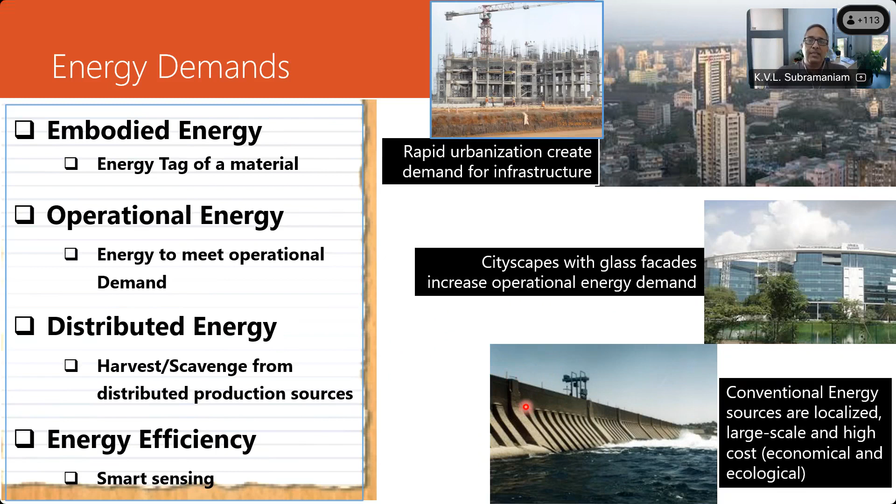And of course, to top it all off, coal is now a bad word. It's a dirty word because coal is associated with carbon. Carbon is a very bad word now, and we're trying to mitigate its effects because of the associated risks of climate change. So this is the overall story, the things we are grappling with, and the construction of tomorrow will have to address all of these issues - whether it's our built forms, the need for infrastructure, how we address it, and how we handle our energy needs, with carbon as our background.

Now, embodied energy is becoming very important because we paid scant regard to this previously, but now we're looking to address this issue because at some level, energy gets linked to carbon - energy comes from burning coal, and that has a very negative impact on the environment. So we're looking at low energy materials and sustainable production.

This becomes particularly important in the context of construction and infrastructure, especially in the Indian context, as I will lay out in the next few slides. Now, the challenge for us is to produce materials in the large volume required in a sustainable manner. We need sustainability built into the practice of using construction materials. I'm going to confine myself to construction materials and the built forms we're coming up with.

So we need to look at the energy tag that goes into making these materials, and that would perhaps form a topic of another lecture. So I'll gloss over this for now, but probably talk more about this issue of operational energy.

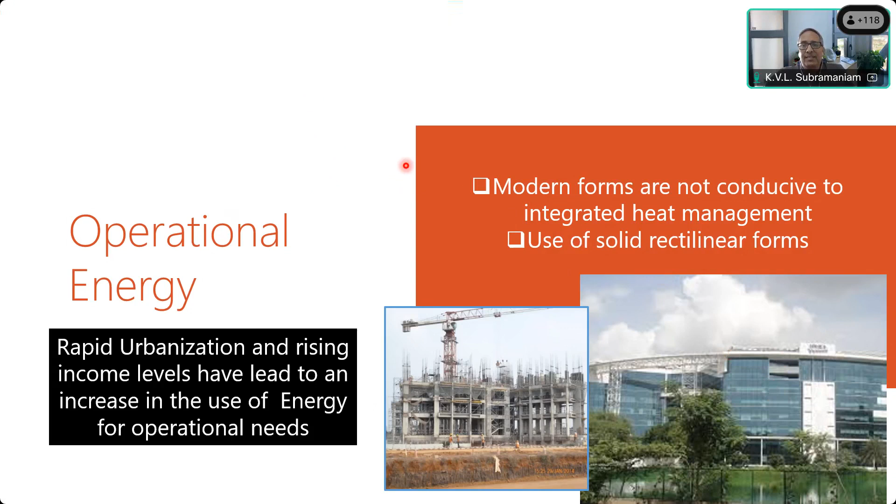Operational energy is becoming more and more important, and this has to do with urbanization - very rapid construction, but more importantly the modern forms we're constructing with massive glass facades, rectilinear forms, and thin solid systems. These are not very conducive to energy efficiency, in the sense that buildings we are constructing in the modern way have very large heat gains, and therefore the requirement of energy for cooling is increasing, making management of thermal and energy demands in cities a bigger challenge.

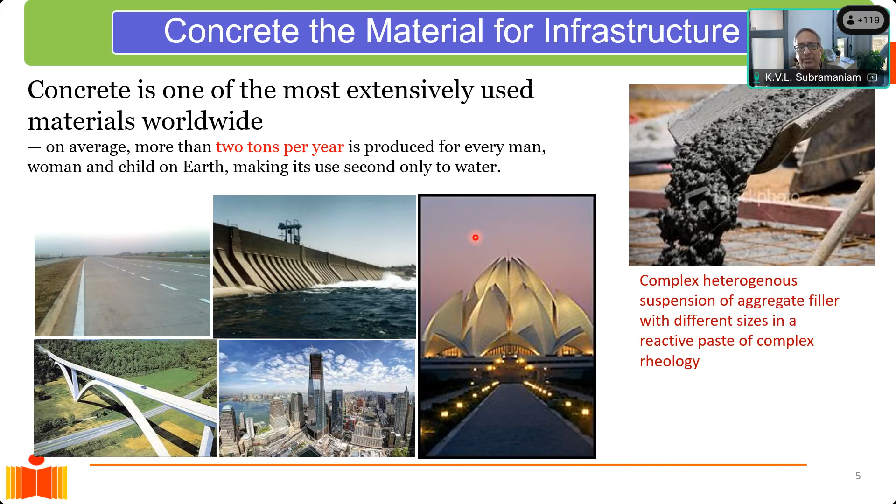Now, in addition to this, if you take a step back, concrete is the preferred material we use for construction. It's the largest used material on this planet - actually the second largest, next only to water. How much of this material do we produce and use? Almost 2 tons per year for every human being on this planet. That's the massive volume in which we produce and consume concrete, going into everything from infrastructure to buildings to roads to dams. Now, the problem with concrete is the cement that we use.

The issue with cement is that cement has a carbon tag associated with it.

So what are we talking about here? China produces the largest amount of cement, and India is the second largest producer of cement. How much are we talking about? It is so much that India and China together almost contribute about three-fourths of the total cement being produced on the planet.

Now, going forward, our consumption today makes us the second ranked producer and consumer of cement. But going forward, our requirement of cement to meet our infrastructure needs is going to be so large that we may become the largest producer and consumer of cement, and by 2050, that is the projection, that we'll perhaps be the largest producer of cement on this planet.

The cost there is that while cement itself is a low-cost manufacturing material with a very low embodied energy, if you look at a comparison of steel and concrete, cement has actually a very small carbon footprint compared to steel. But if you compound the carbon tag associated with concrete with the volume usage that we are projecting, cement is basically the third largest anthropogenic source of carbon in the atmosphere.

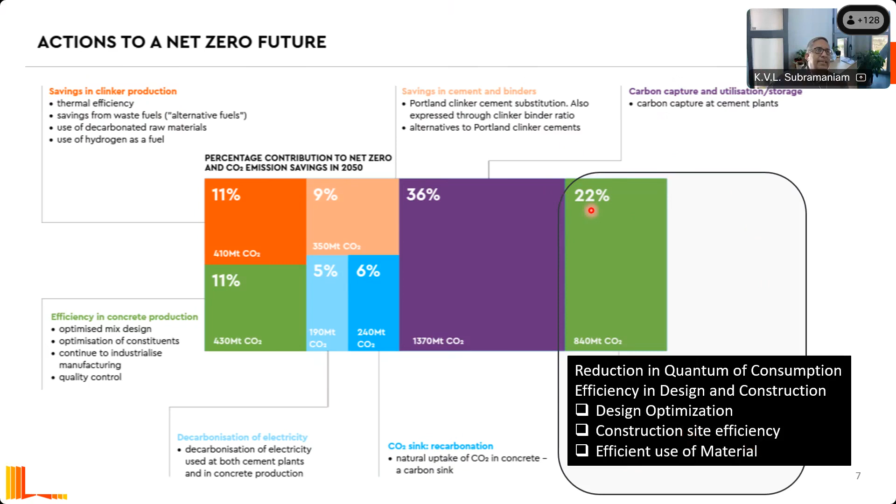Most of our designs, including the way we are putting up these constructed forms, are not efficient. What I mean is that we are using way more material than we need to, and in that process, we are contributing to this additional 22% in the carbon tag, which we can actually save if we go to this level of efficiency.

Now, talking about efficient structures. If you look at modern concrete construction, this is what we typically do: we assemble the formwork, then we assemble the steel, pour concrete, wait for the concrete to harden, and then we strip the forms and go to the next floor.

Now, this process is quite time consuming. It is not very efficient. And what is worse is that we are limited to rectilinear forms. And what I mean by saying rectilinear forms is straight line forms.

Now, if you look around your room, you'd find that we basically have all our beams, and if you focus on the beams, most of our beams are rectangular in shape. Now, the reason we make them rectangular is for expediency. Expediency in the sense that we basically opt for convenience during construction. It is very convenient for me to pour concrete into a rectangular form. And all of us know that rectangular beams are very, very inefficient.

I can actually give you a beam that gives the same strength and the same level of performance in terms of stiffness or any other parameter that you choose, using an I-beam perhaps, or a beam that uses a different shape than a rectangular shape, because such shapes are actually more efficient, structurally efficient. So I'm able to give you better performance for lesser use of material.

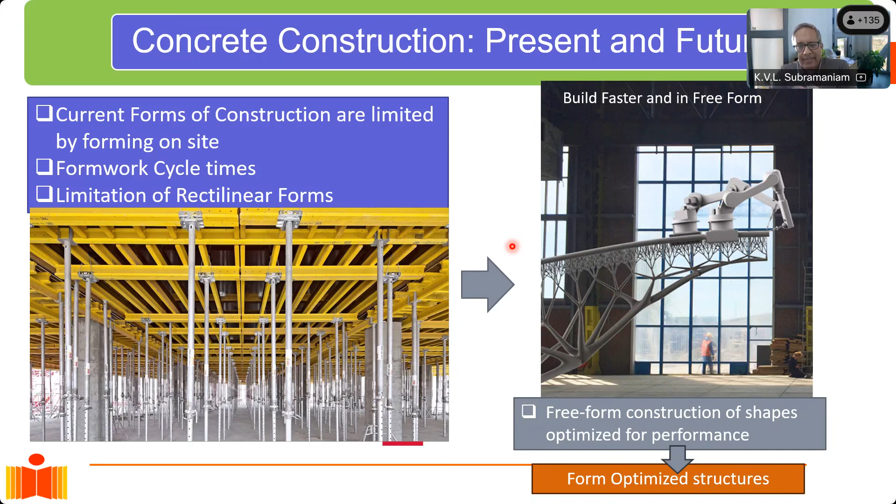I've kind of set the stage. I know I've taken a little bit of your time here, but now let's start moving. So what is 3D concrete printing? Basically, we've adopted from what is called additive manufacturing. The mechanical engineering community is very familiar with this. It's a very mature technology, which is used in production of several parts, in automated assembly, in automated manufacturing, etc.

There are different forms of additive manufacturing. And what we have adopted out of this is material extrusion, which is one of the forms of additive manufacturing. And that is the form that we have used in our construction. The reason is scale up, because this is the one form of production, and it's called additive manufacturing because

if you look at typical manufacturing, what happens is you start with a block of metal and you start removing material from there, and then you give it the final shape. So that is subtractive manufacturing, and typically that's what we do. But in additive manufacturing, what we do is that we add material and come up to the final shape.

So what do we do in the extrusion process? We basically construct a whole structure one layer at a time. And there are components of this additive manufacturing. We have the pump, and then we have the placement system. The pump basically conveys the material to the nozzle, and the nozzle is what moves around and places material where we want it to be placed.

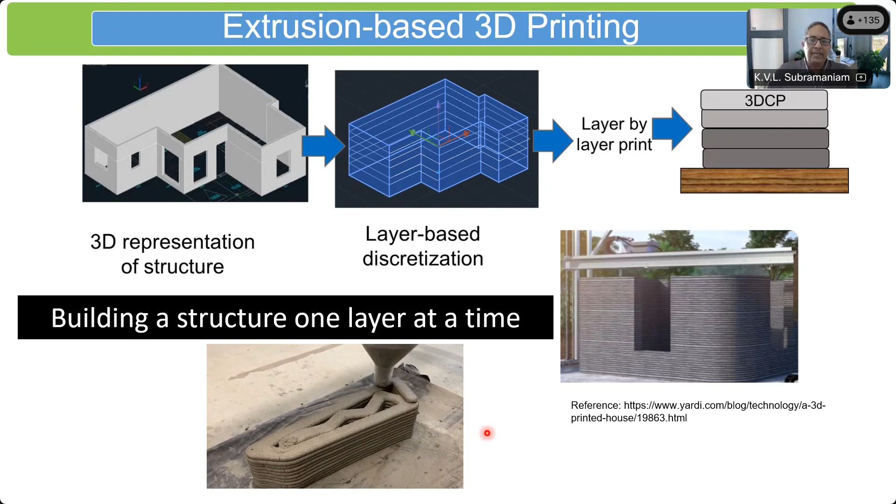So this is the printing process where you see the layers being added on to assemble the entire component. So concrete that's being printed in a layer by layer manner, right? So now, the process, like I said, in additive manufacturing, the way that we produce the layers information, it's called tessellation, slicing, the fabrication. All of this has actually been standardized in the manufacturing community. There's an ASTM standard that's available for use on this.

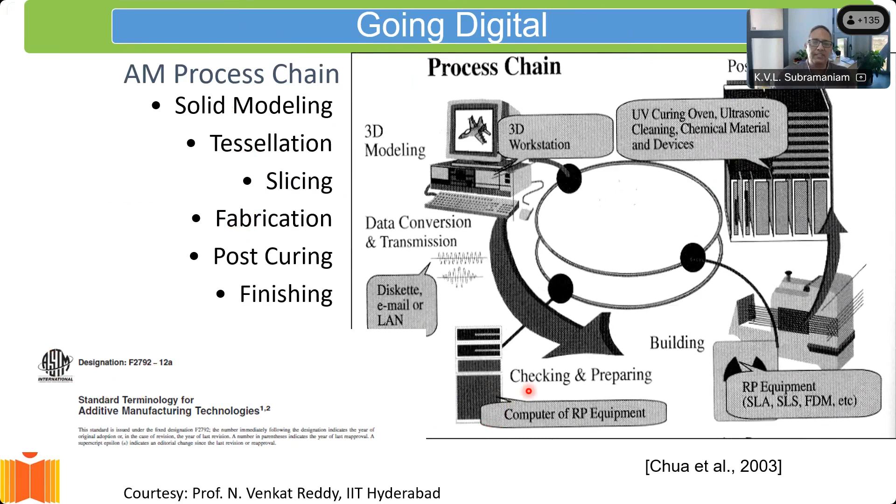And this extrusion-based 3D printing is used quite a bit now. In fact, one of the most interesting uses of 3D printing is in plastics, and bio inks are being used. In other words, there's a lot of talk about printing tissues, bioscaffolds, and a lot of our dental implants. Most of these are 3D printed today.

And the technology has advanced to the point that we're talking about printing on a miniature scale with precision. And where this works beautifully is that when you're talking about something like a human body, every person is different. So I cannot use a one size fits all. Customized solutions have to be developed. And that's where I can actually print, let's say, a bone or a tissue that is suited to an individual

based on their needs. So now the thing is, well, this technology is very well established, but how do we actually port it to civil engineering? What is our challenge? The biggest challenge that we have is most of everything that is happening in the manufacturing sector and in the bio sector, they are limited to millimeters or centimeters. What we need is something that scales up to meters and tens of meters. And the other challenge is the material that we're using.

So let me first give you some examples of what has been printed with concrete, just to show you that when you start freeing up the palette of an architect and remove them from the shackles of doing rectilinear structures, you can start doing geometric forms which have been optimized for a certain use, and they need not be straight line shapes, and you start providing better aesthetics.

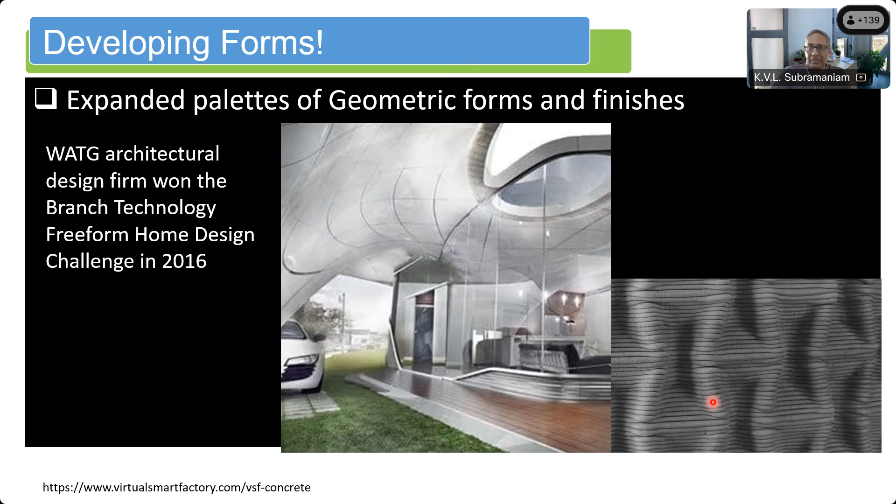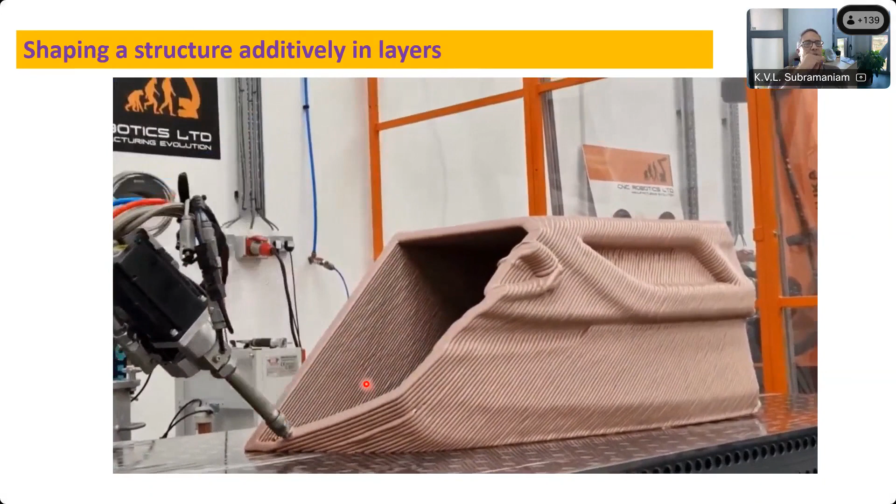Now, let's see if this video plays. I just want to show you about shaping a structure by adding in layers, and that we are not limited to producing shapes. And what I want you to see here is you can start printing shapes which are not limited to printing on a horizontal plane. If you actually get your material right, in this case, the material that's being printed is a clay, this is developed by CNC Robotics Limited, and you can see the kind of shapes that you can actually produce with this 3D printing technology.

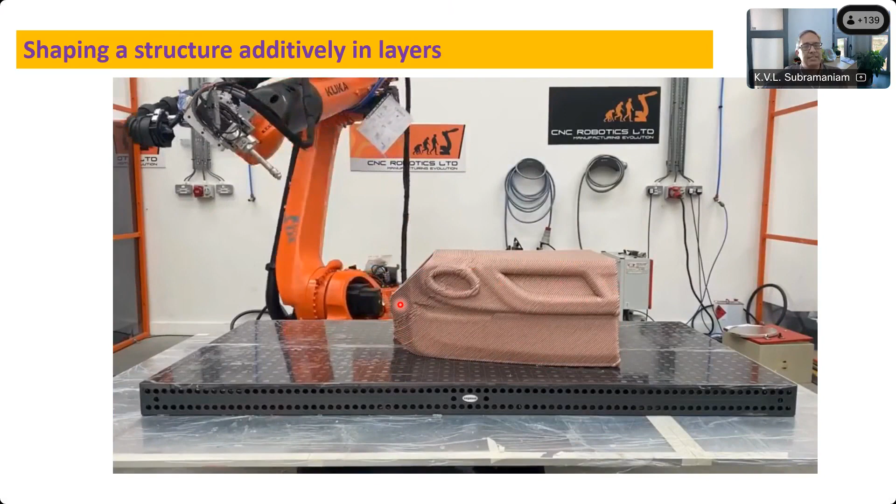Of course, there's a challenge with the material. It has to withstand the rigors. Once you deposit it, it shouldn't slide off, and all these requirements can be engineered. But you can start doing this. You can start giving these surface finishes. You can start doing these projections and other things. Those are all very much possible and within the realm of normal 3D printing.

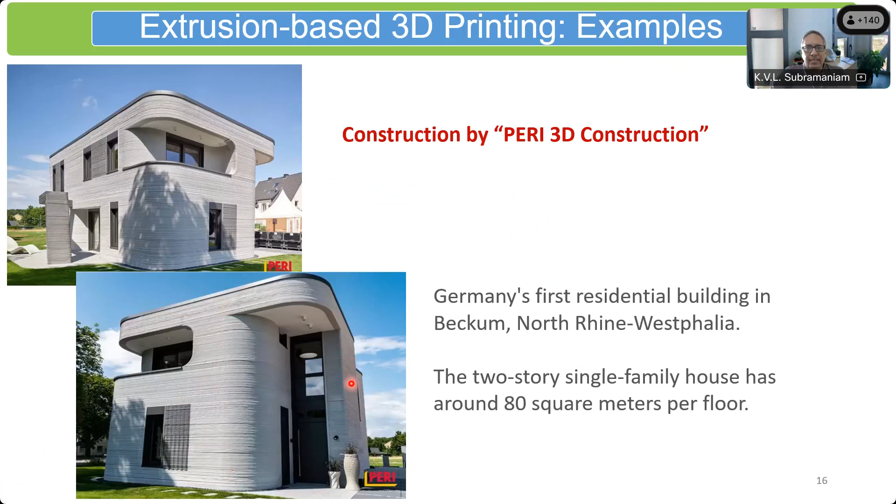Now, this is the first 3D printed house in Germany. It was about 80 square meters, about 800 square feet, done by PERI Construction, and you can see the layers that are deposited here. So basically, this entire house was built one layer at a time. The largest 3D printed multifamily house in Europe, it's a 5-family house, about 380 square meters. Took about 6 weeks to print the entire structure.

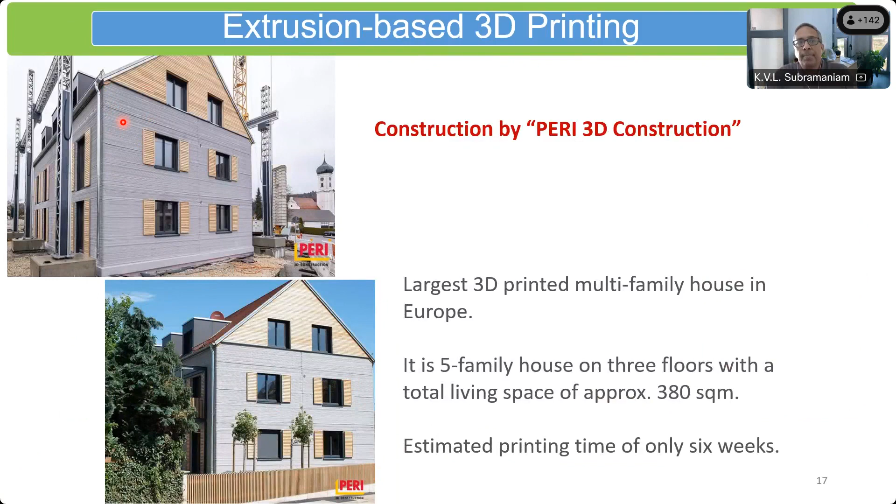Of course, we always give you the good news. We don't tell you the time that was used up in planning. But this serves as a demonstration that such things can be done. And the other thing you would notice as we go along is the sophistication that has increased with the printing. This was done 5-6 years ago. You see the layer definitions are very coarse here. These have improved over the years. Now we're coming up with very good layer finishes, and we are getting into more complex forms.

And Europe has now caught on to the fancy of going back to the traditional forms, whether materials or shapes. So they are experimenting with the use of clay, which was our traditional construction material, because it gives superior thermal performance and moisture control inside the house.

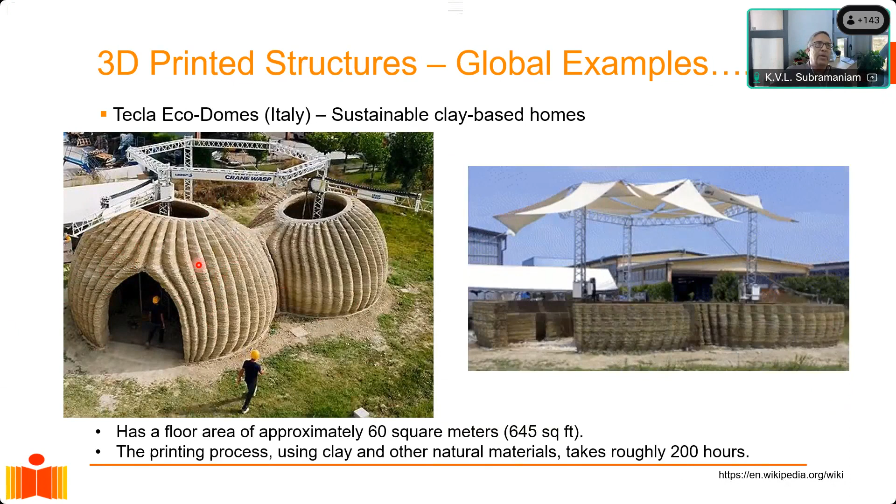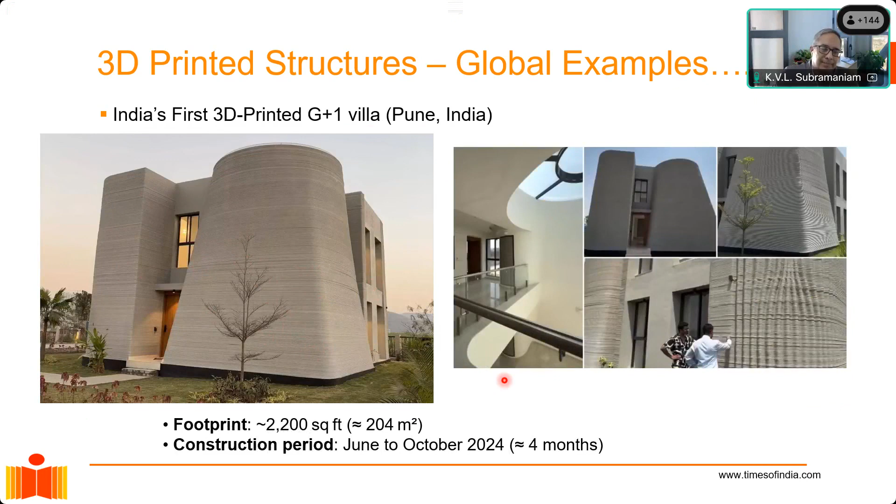This is a 3D printed house, a villa printed in Pune. You see the facades that have been printed, and the shapes that you can provide. You can incorporate elements of architecture to give better thermal comfort in terms of passive shading, or orienting the elements of the structure with respect to the direction of the sun. So 3D printed facades is another area where we can create beautiful facades with 3D concrete printing.

Another interesting application was done by Simpliforge, my industrial partner. They actually 3D printed a temple. So you see, this is the form of the temple.

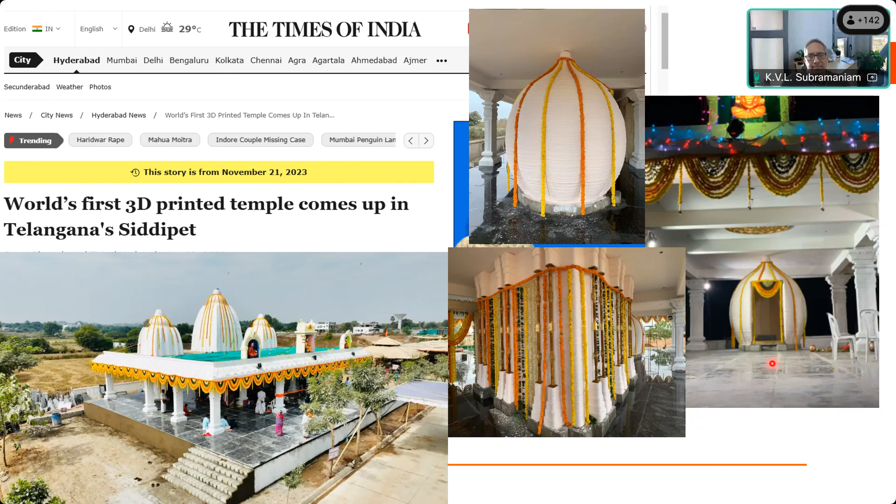This is the 3D printed temple. If you look at the spires of the temple, these were 3D printed. And if you look on the inside, one of the temples here is modak shaped, and the modak shape was actually printed. So the entire temple was 3D printed with these beautiful shapes, which can be customized for our cultural, aesthetic, or architectural requirements. That is the background about what we are doing with concrete 3D printing.

The most important thing, at least as an engineer, that I'd like to talk about is this concept of efficient construction, because now I have a technique which allows me to use material in an efficient manner. There's a whole concept we are developing called material follows force. What that means is, if I look at a rectangular beam and do a stress analysis...

I will find that there are several pockets within the beam which are not contributing to the structural response. In other words, I could remove those pockets of material, and successively keep removing material that is not contributing or not getting stressed highly, retaining only the material that is highly stressed. In doing so, I come up with very efficient forms of structures, which I'll demonstrate a little later, ending up with lightweight structures without compromising performance, produced using less material than conventional structures.

So this would again feed into this whole push for net zero, where I'm doing more with less, and therefore able to stretch the usage of my material to build more structures. That inherently gives us a leg up toward that 22% reduction target in the push towards net zero.

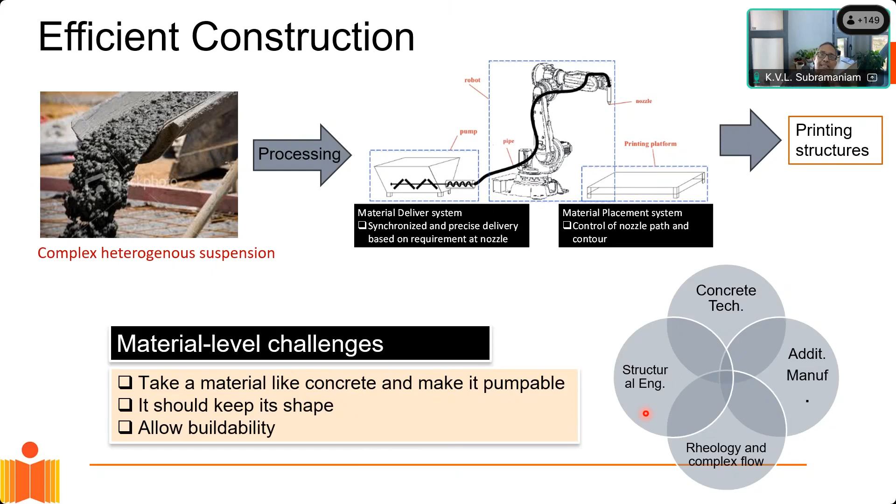Now, what about pumping? I'll take up each one of these things a little, one piece at a time. We are very comfortable.

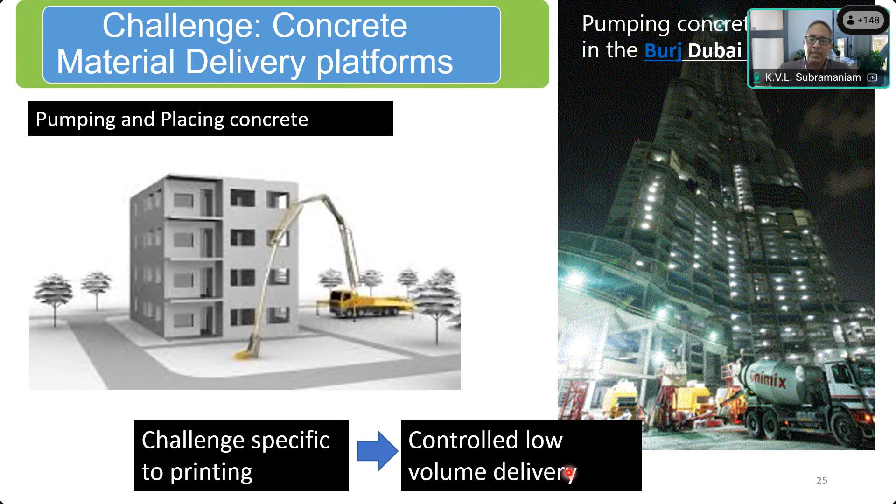But the pumps are developing. We are at IIT Hyderabad working on different pumping systems which will allow us to scale up to 10 millimeter aggregates, and slowly we'll catch up and start being able to deliver these pumps for 20 millimeter aggregate as well. Now, the next thing is the delivery platform.

You're pumping concrete, but it has to be placed precisely, which means I need some way of controlling the head—wherever you have your nozzle. This pipe conveys the concrete. Please remember, this concrete, as we're talking today, looks more like paste, because we're limited to smaller sized aggregate.

As this nozzle moves along, it starts depositing concrete. The movement of the nozzle itself is controlled precisely. We have two types of placement systems: one is called the gantry type 3D printer, and the other is the robotic arm system. The robotic arm system is basically a robotic arm, typical of what you see in car manufacturing assemblies—these are the same robots used for positioning systems.

Each has its own advantage, and now we've developed these on the industrial scale. Robotic arms give you flexibility and very fine control, but if you want to go larger, we use gantry-based systems, and you can start printing very large structures. Structures like silos have already been printed using these gantry systems, and I think about 30, 40 meter tall gantries are available today for printing.

Then there's also a crane style depositing or delivery system, which works on the concept of the crane we use for construction. This can even be mounted on a crane.

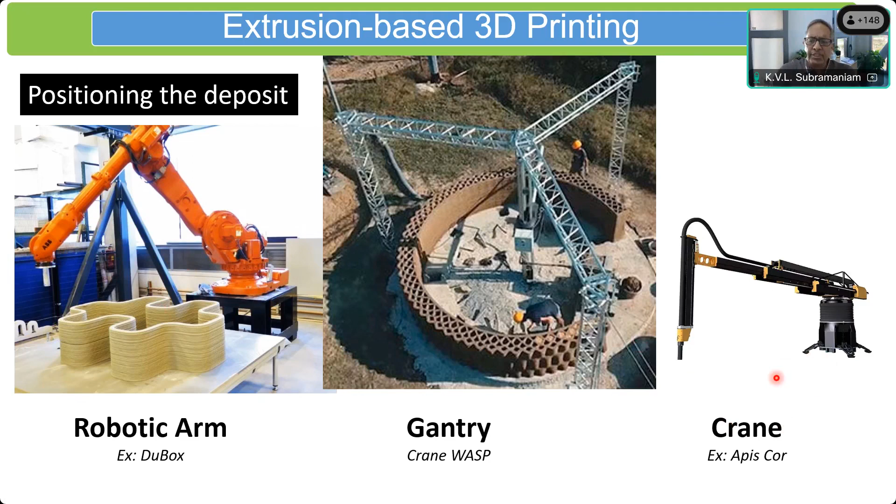So we've looked at the pump and the delivery system. Our challenge in the pump case was developing pumps that give us precise control on pumping material in very small volumes. The challenge with the delivery systems was scaling—the technology was already available from the manufacturing sector, but it was built for centimeter scale. We needed to scale it up to meters and tens of meters. Everything had to be scaled up, but that's done. The control systems, the programming, and all of that have pretty much been adopted from what's available in the manufacturing sector.

Then comes the next challenge—what we call the ink that we use. 3D printing is basically just like printing: when I print on a piece of paper, it deposits ink on the paper. In 3D printing, that ink is deposited in multiple layers—you deposit ink on one layer, then go to the next layer and deposit on that layer, and so on. This ink, the material I use to print, is the next big challenge.

Your regular concrete will not be printable. So what kind of material do I need? I like to illustrate that using this toothpaste analogy. What I want is my concrete to behave like toothpaste—if you look at toothpaste, when it's in the tube, it sits in a semi-fluid, gel-like state.

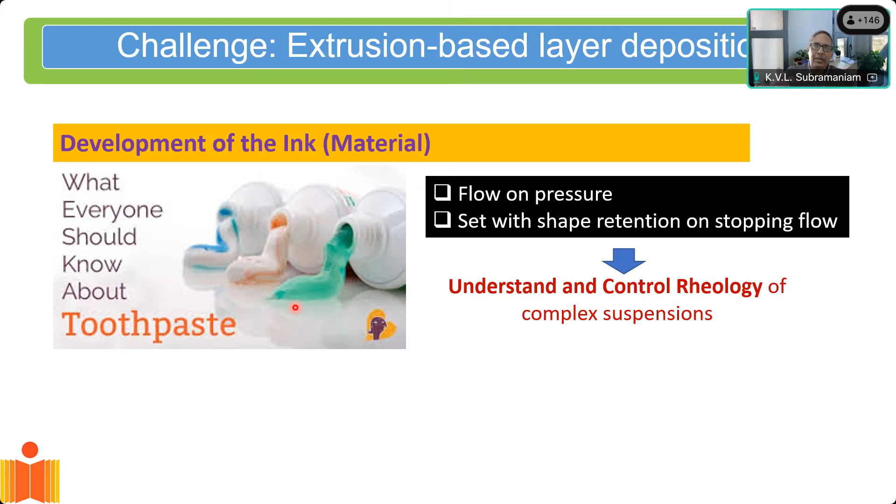In addition to this, I have another requirement called buildability. So what are the requirements of concrete that I need to address? Concrete has to be pumpable, it should be printable, and it should keep its shape. Up to this point, the pumpability and shape retention—it has to behave like the toothpaste I was talking about. But there's an additional requirement, called buildability.

Imagine I extrude one layer of toothpaste and start adding more layers on top of it. The bottommost layer should be able to withstand the stress coming from the additional layers without spreading, because if it starts spreading, the geometric shape gets distorted. So it not only has to be pumpable and have shape retention as it comes out of the nozzle, it also has to allow stacking of multiple layers—and all of this happens in a matter of seconds to minutes.

It's not like concrete is setting—it's while the concrete is still fresh that I have to allow this buildability. So these are extreme challenges in terms of material. I really have to engineer the material, and that's where most of our effort has gone: producing mixes that can be printed, meeting this troika of pumpability, printability, and shape retention and buildability.

Now, some attempts had previously been made. Shape retention is not a big deal—we use slip forming, already used in slip form paving machines, where concrete comes out with no formwork. It's extruded literally into shape. So we've mastered how to produce concrete that has shape retention. But this is not concrete that is pumped.

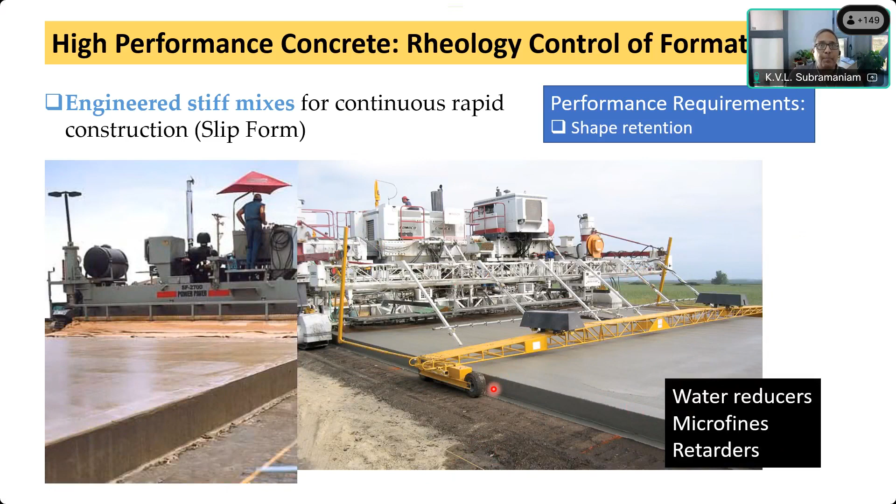That is one of the requirements of printing, but I also have to make it pumpable. So that was my additional challenge: somehow make it flow through a pipe, come out, and then keep its shape. That was the challenge in material development.

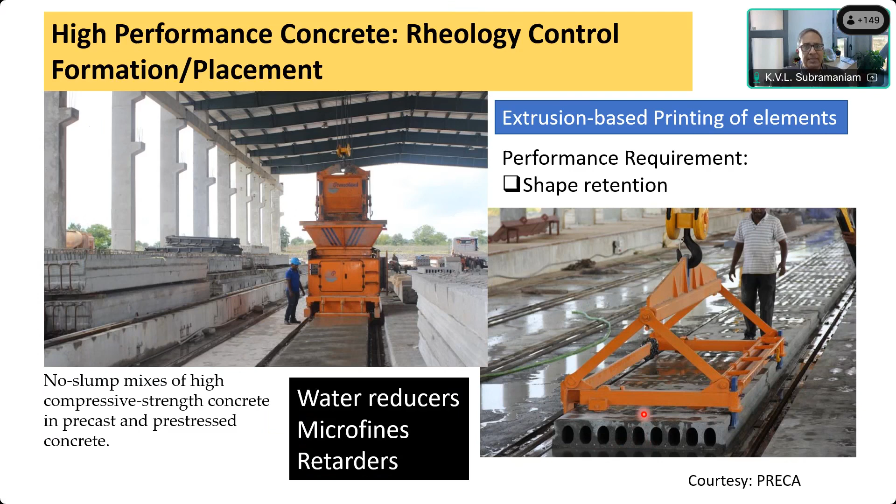The other property, dealing with buildability, brings in something called thixotropy. This is where we, as concrete engineers, started realizing we really have to understand the rheology of the material—how materials flow. Thixotropy is the behavior shown here: the material itself resists flow until you push it, but once pushed and it starts flowing, it flows very easily. So you see what's happening here.

It's like a rectangular or cubic shape. Once forced to flow by tipping it over this edge, it takes a circular shape and glides on the surface very easily. The minute it comes out on the other side, it goes back and keeps its shape. So what's happening internally is the structure is initially in that gel-like state—it won't flow unless you pressure it. That is the tipping point here.

Once it starts flowing, it'll basically allow smooth flow, and in fact optimize itself in such a way that you get small resistance to flow. And the minute you stop the flow or the pressure, once you come out on the other side of the ledge, it basically goes and takes the shape that was given to it. It becomes like this rigid shape again. This is called thixotropy, this property of a fluid which can change depending on the pressure state and structure itself internally, keeping its shape and allowing you to build on top of it.

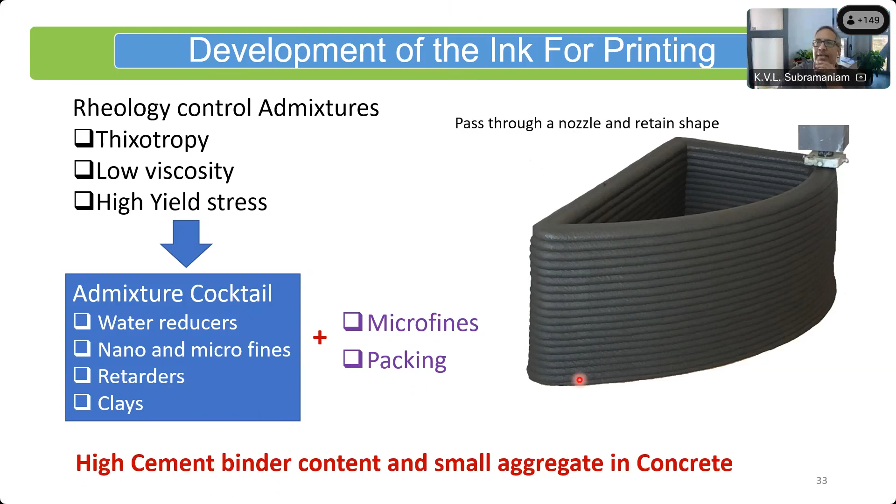The printable concrete mixtures are a cocktail of admixtures. We use a lot of admixtures in concrete today, a lot of microfines, and concepts of packing — everything goes into what we call a concrete mix today. But because of limitations of the pumps we're using, we are limited to concretes with high cement binder content and small sized aggregate. Currently we are limited to about 4 to 6 as the largest size aggregate in the concrete. Yes, I'm getting to reinforcement, so please bear with me.

Now, the next thing I want to talk about — we've talked about the challenges in the machines, the technology for pumping, technology for placing, and we've looked at the material demands. Now I want to talk about structural forms. Since I can deposit material where I want to, why not print shapes that are structurally optimized and give the best performance?

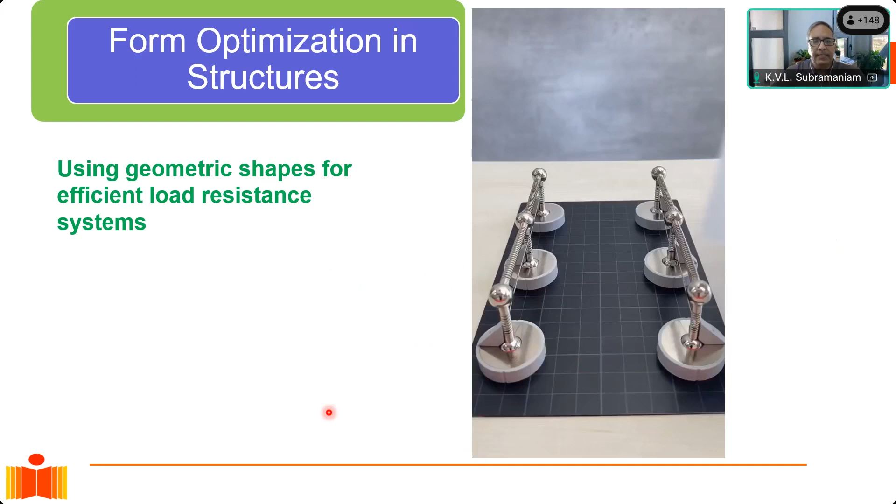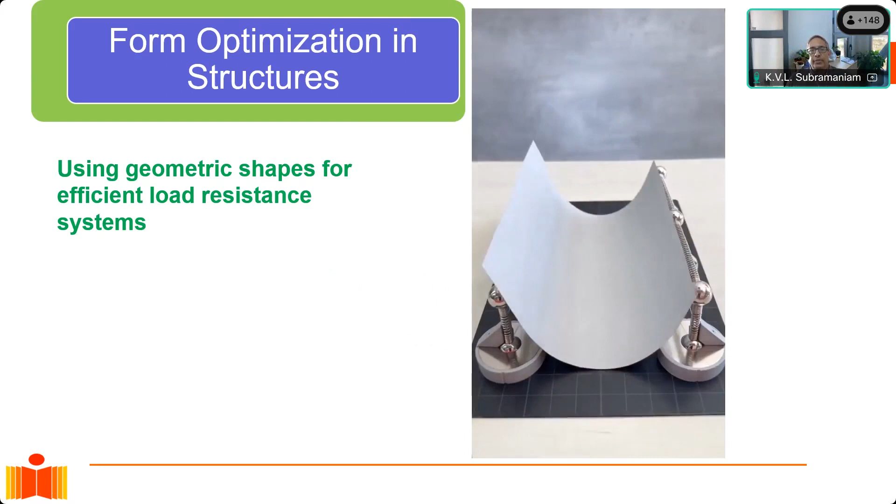Those structures would be called form optimized structures — structures that deliver more with less. Let me illustrate that, where I can use a geometric shape to provide a very efficient structural system. It's actually a video I got off the internet, not mine — it comes from LinkedIn. But just to illustrate the concept of form optimization, where I use geometric shapes to provide better structural resistance.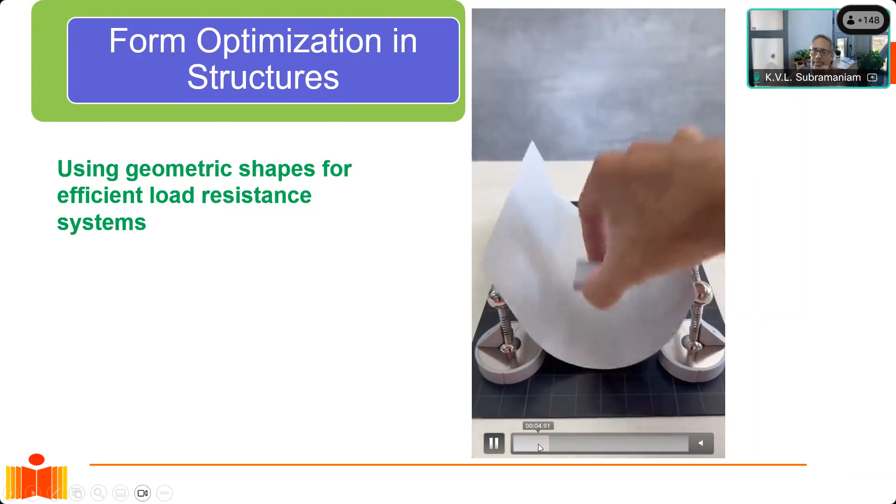So you see the difference between a flat structure and an arch. We know that an arch behaves much better in providing load resistance. Let me back up a little. This is a flat structure — if I use a flat element like a slab, we know it's not very efficient. The minute I go into an arch-shaped structure, you see that the load resistance improves significantly. It is able to carry much more load.

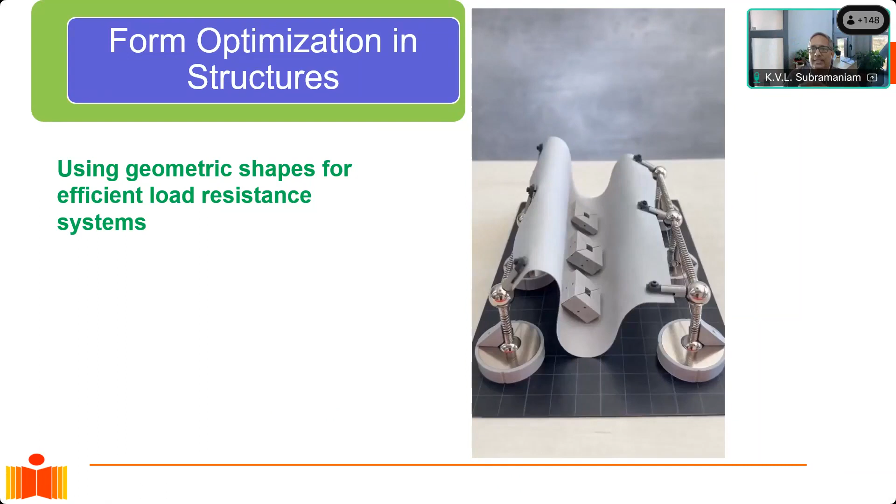But if I take the same arch and put it in this dimple-in, dimple-out kind of shape, you see that the structural resistance improves significantly. Same material, just the geometric form gives you significantly higher structural resistance. So what have I achieved there? Significantly higher load carrying capacity just by varying the geometry in which I'm putting the material.

The beautiful thing is that when I went from the flat structure to an arch, the entire structure is in compression. So when dealing with concrete, which is very strong in compression, I don't have to worry so much about reinforcement. Second, if I look at geometric features like those dimples in the arch, it becomes even more efficient in carrying the load.

So what stops us from doing these things? One is the current forms we are using — we used to build with arches and domes, but now we've gone with flat structures for obvious reasons. What stops us from doing these dimple shapes and other things is our current methods of construction. If you had to do that shape on site, it would be prohibitively expensive because of the amount of labor required and the formwork, which is not easy to assemble for that kind of shape.

But I can take it one step further and develop this concept of form optimization in structures. That's what we demonstrated at IIT Hyderabad, where we said: look, if you take a rectangular beam and apply a load on it, you'd find that the load applied is transferred to the supports in the form of an arch.

So this concrete basically carries this load in the form of an arch. Now the rest of the material really doesn't do much. And of course, if you have a concrete arch, you'll have to tie it together because there needs to be some tension.

So if I can now start working on this concept of an arch, I can start developing a very efficient structural shape. And basically doing that process, we came up with this shape for the bridge, which was structurally more efficient than what I got with a rectangular beam of the same size. And we basically demonstrated this concept in a bridge that we designed and installed on our campus. So let me now walk you through this.

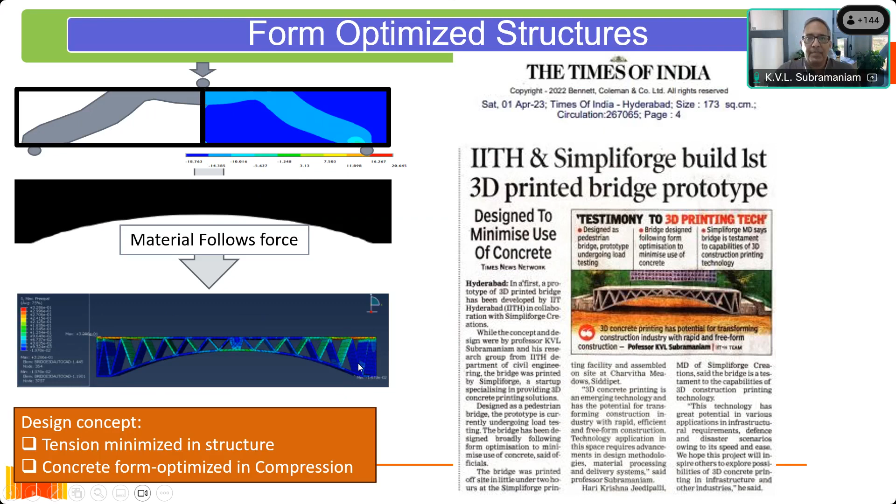This is the concept that we worked with. The concept was that of a tied arch. Now here, the concrete element itself would be in compression. So it's an arch. You need a tension tie to balance it, because otherwise you will not get a balance between compression and tension.

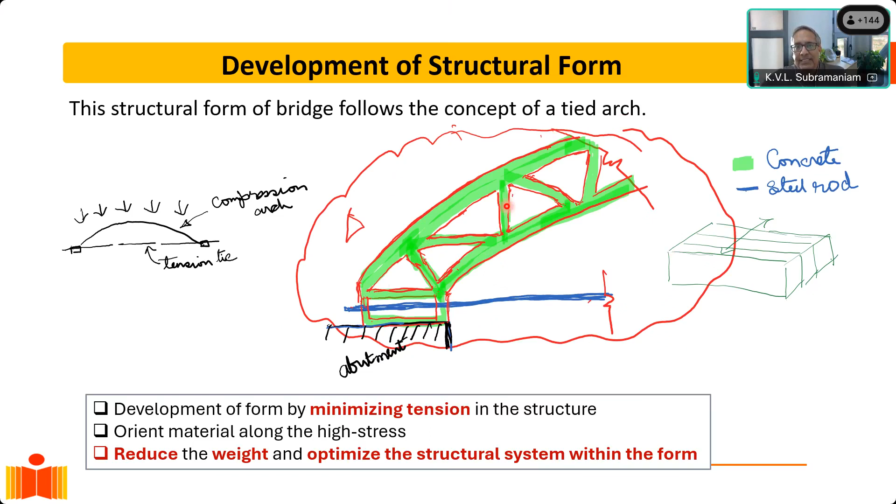So these are literally copies of my notebook that I was using as we were working in a group with my students of what I wanted the bridge to look like. I wanted a tied arch, and these are the filaments that we would actually print. So now let me walk you through the steps. So this is the point.

So if you take a beam and apply a uniform distributed load on it, you find that basically the upper arch here is where the concrete is in compression. The bottom part essentially is all in tension. So you can actually take away this concrete, which is in tension, and basically retain the compression part of concrete and tie it together with a steel tie. And what you have is this compression arch.

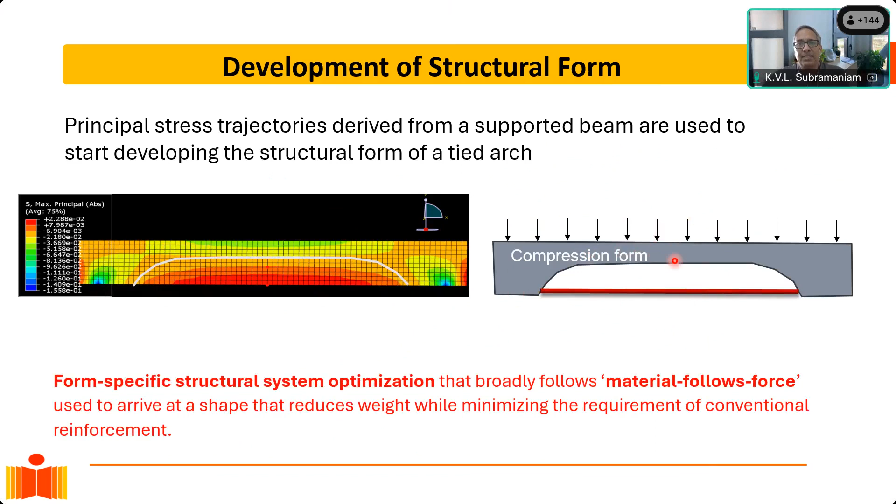Now within the compression arch, we can go one step further and actually develop a structural form, and this process of developing the structural system is called the Mitchell truss analogy. You can follow the Mitchell truss analogy, which allows us to basically develop structural forms following the stress contours that come from stress analysis. Now, broadly, I'll throw this term out there. We follow this terminology called topology optimization. Topology optimization is basically where you optimize a structure.

Now, if you think about the shape of any natural object, let's say we take the shape of our bone, there is a reason why it's in a certain shape. From millions of years of evolution, nature has come up with an optimized shape for the bone. And if you look at the bone, it's not solid, it's actually hollow. And it has a certain hierarchy. If you look at the porosity of the bone, it's also graded. It's not exactly uniform. That particular form of the bone has been optimized for a very high level of load resistance through a natural process.

Now, that is something that we hope to mimic here. What we're trying to do mathematically is to develop a form from this rectangular shape and come out with something that puts material only where it is required, and gives me structural performance that is on par or better than what I get with the rectangular beam.

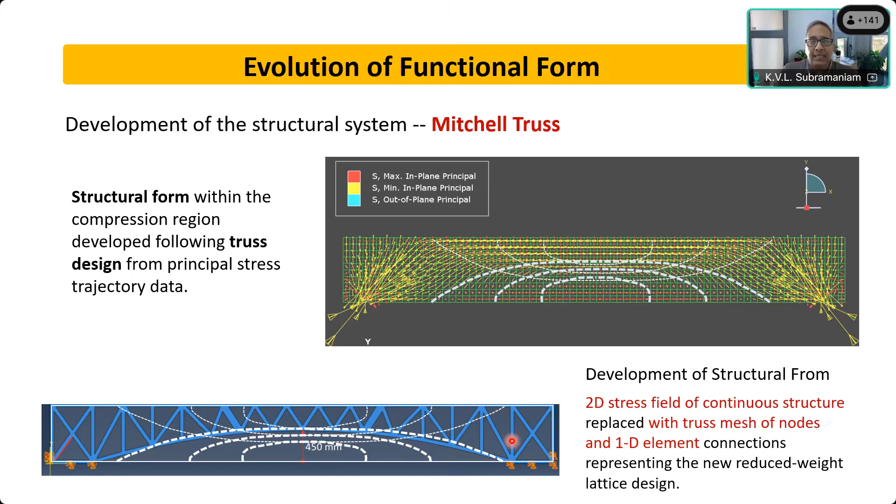So this is the bridge that was printed. It's a 7.5 meter bridge. The weight, actually, we've just redone the numbers. It's actually 1/3 the weight of a concrete beam that would be required to span the 7.5 meters. And this particular bridge has been designed for IRC standards as a pedestrian bridge. When we actually did the analysis, we found that it could actually support the weight of full traffic. So I could actually put it for IRC class loading, even allow traffic on it.

Now, if my video plays here, I get a 5-minute break because I let my students do the talking. They're the ones who were actively involved in printing this, the video.

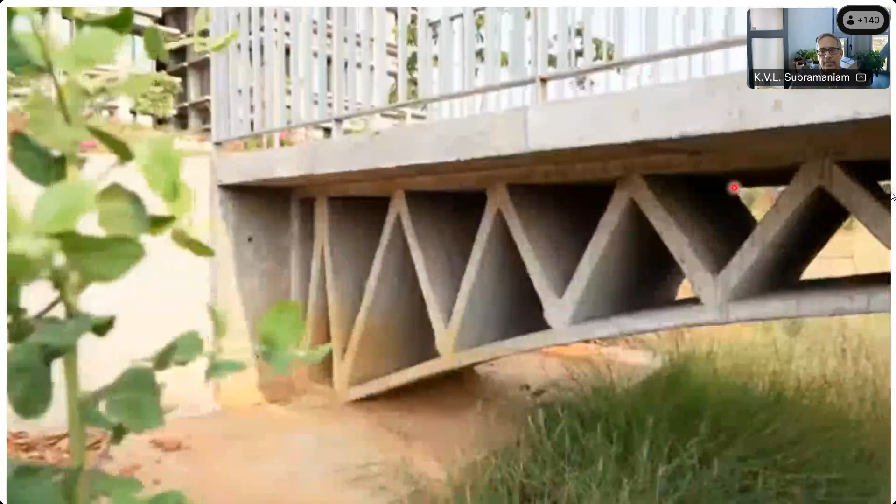So this is a bridge that has been 3D printed. It is off-site printed. It has been designed to IRC standards as a pedestrian bridge. The final form that you see here has come out of a process called material follows force. What that allows us to do is to deposit material where it is required. We can deposit more material in the highly stressed parts and less where the stress is lower. Following this process, we end up using the material very efficiently, and what we have are lightweight structures. And this bridge is a demonstration of this material follows force.

Using this principle, we explored different geometries. Each of these geometries was stress analyzed, and the stresses in each of the members were calculated and checked, and the best geometry which had the stresses within the permissible limits was finalized.

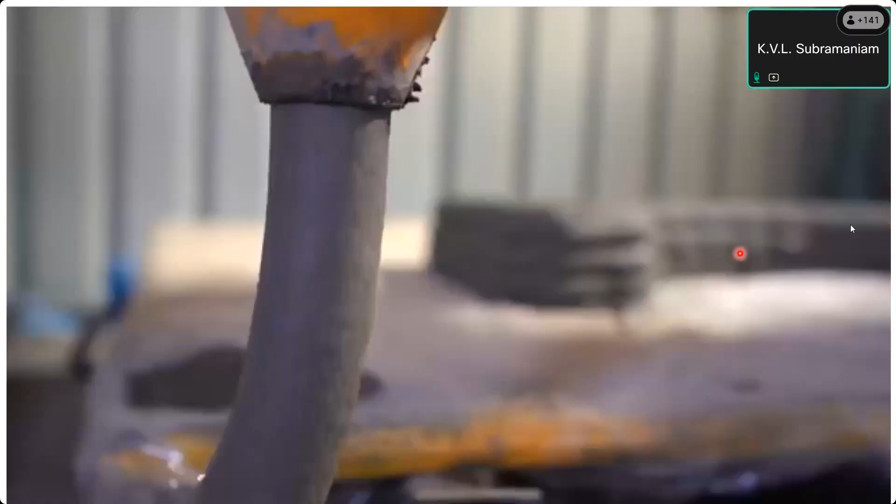The material, the concrete material that could be printed or printable concrete, had to be developed, and it was developed. This material has to withstand the rigors of pumping and give us the characteristics of printability. So such a material was developed. It was extensively tested in our laboratory.

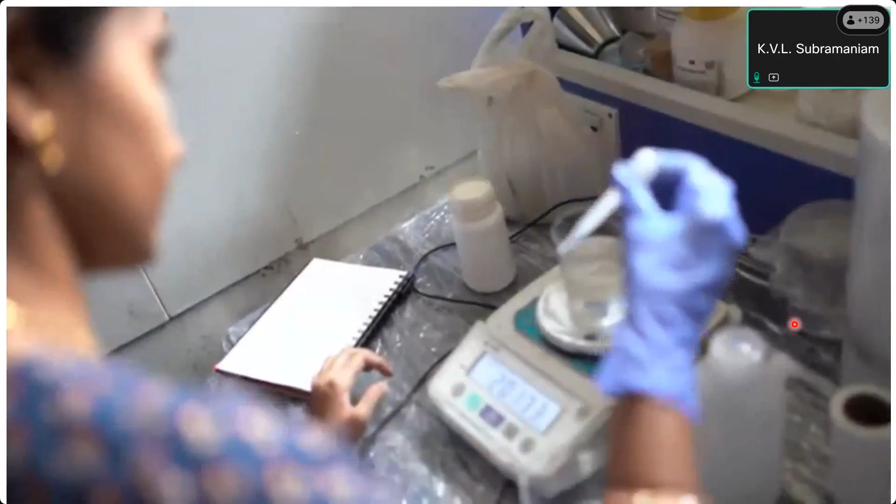The basic binder, which is developed for strength, is not actually suitable for printing. So engineering the material to understand the rheology and to achieve the printable properties would be the most critical aspect. So to make it printable, the rheology needs to be understood and modified accordingly. So the rheology requirements for a printable material or a printable paste would be a high yield stress, low viscosity,

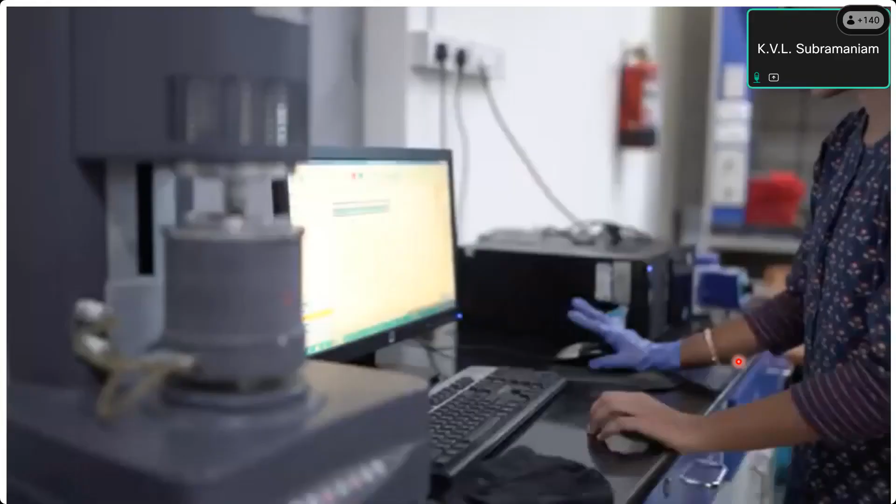and an adequate thixotropy. When it comes to concrete, the important parameters would be particle size distribution and volume fraction of the aggregate, and then the packing of the material. So only when all of these properties are engineered properly, a 3D printable material can be achieved.

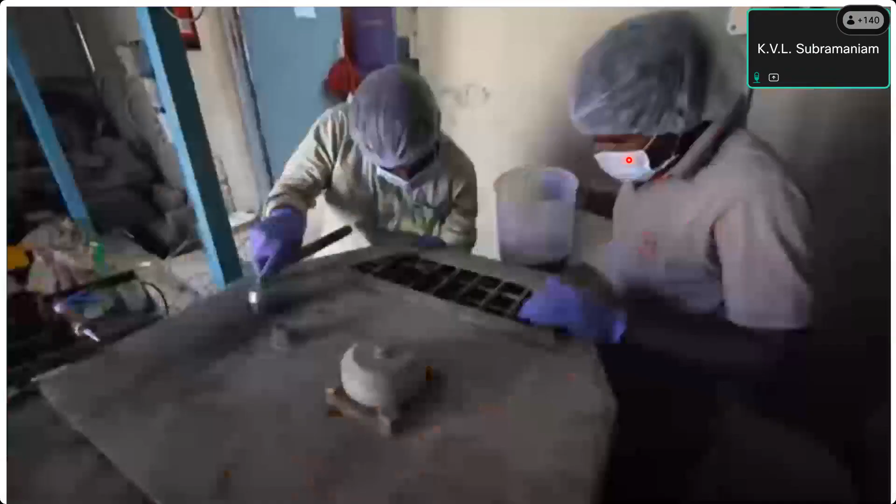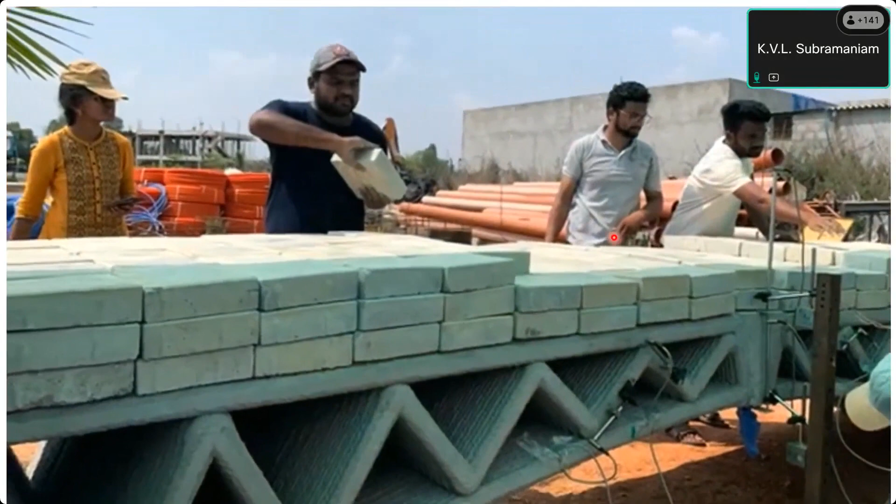Then we had to look at reinforcing schemes for introducing reinforcement in this structure. Several reinforcement schemes were tried. After testing the material and the structural forms, a smaller prototype of 5-meter span was printed, and it was load tested. The load testing was used to calibrate our numerical model, which helped us understand and gain some confidence in the performance of the printed structure.

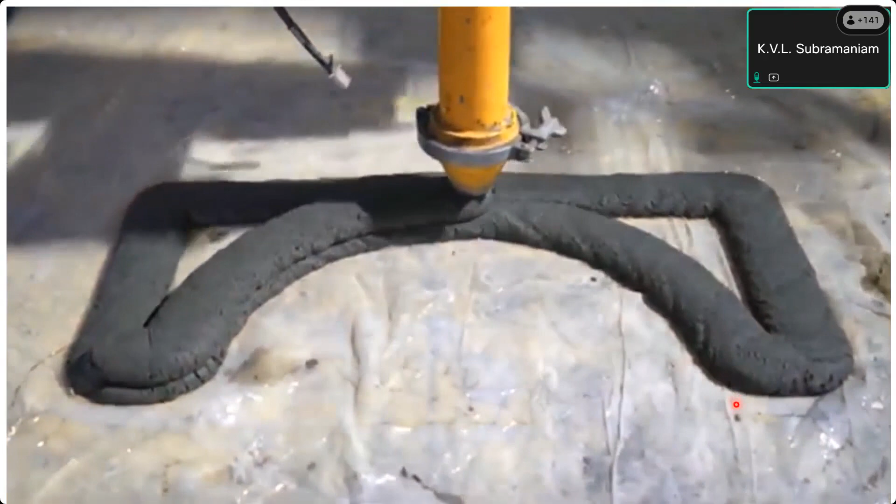We tested cubes that were cut from printed specimens to account for any directional variations that might not be properly reflected in mold-cast cubes. We tested them for compression and used those results to finally obtain the compressive strength of the mix.

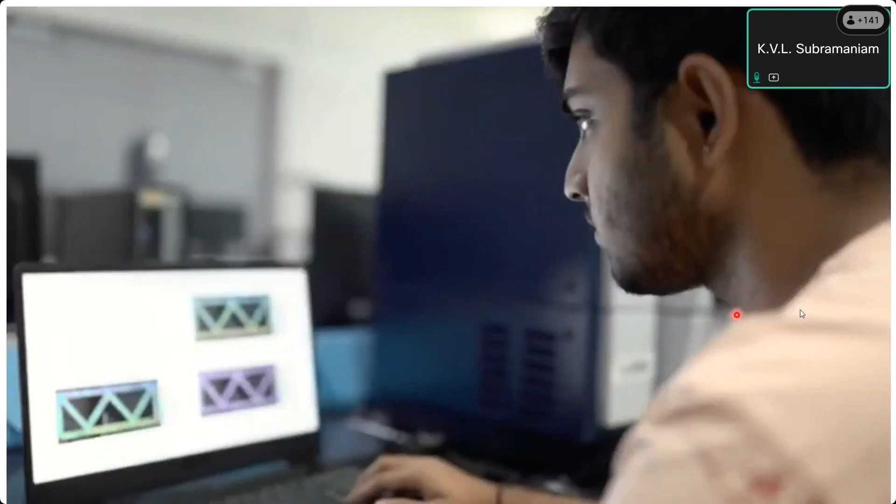Next, we tested a few beams to identify and understand the behavior of the beams in flexure. We did the DIC analysis of the same to understand how it is behaving under fracture. After the geometry was finalized, we printed a few truss and arch elements. We used the analysis results and the actual test results to verify our theory.

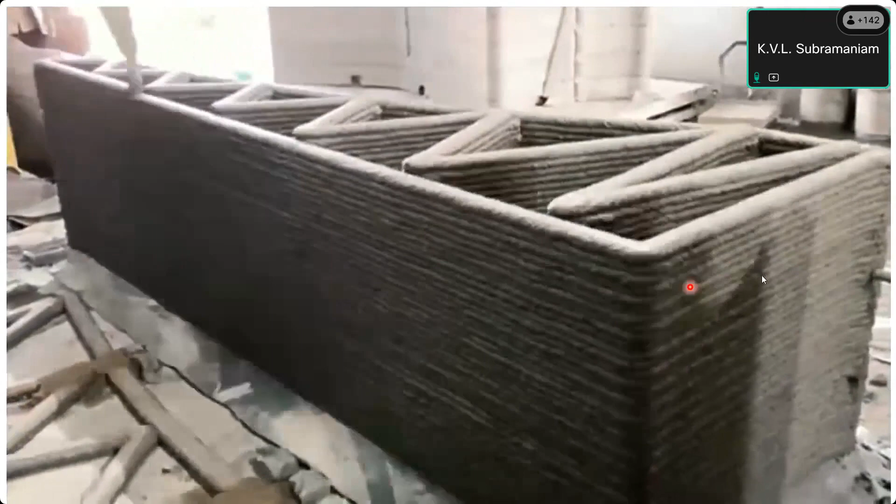And only after that we undertook this process of printing a 7.5 meter spanning bridge, which now conforms to the requirements of IRC standards for a pedestrian bridge. It was printed in 2 halves. It was off-site printed. The off-site printing was done at Simply Forge Creations Limited, which is a startup company. They printed the entire bridge, the 2 segments of the bridge, over a span of 6 hours.

Simply Forge 3D Creation is a robotic arm-based complete 3D printing company. And along with IIT Hyderabad, we have developed India's first 3D printed bridge. So the 3D printed bridge installed at IIT Hyderabad is a 7-meter long bridge, which was built in 2 parts. It had minimal reinforcement and was built in a compressed arch geometry.

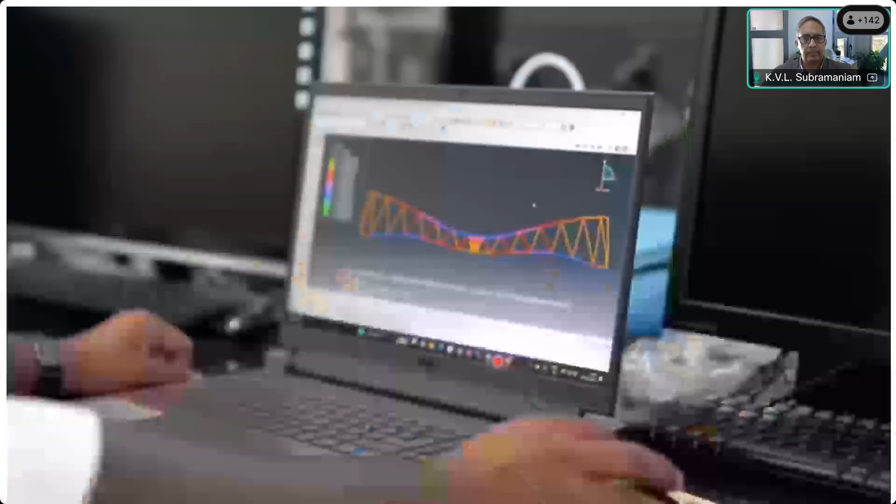Talking about the geometry, IIT Hyderabad had developed the geometry in multiple iterations, keeping the printing path in mind. The bridge was printed using Simplicrete, the material which is indigenously developed by Simply Forge, and it was extensively tested for rheology and other parameters by IIT Hyderabad for the qualifying criteria of the bridge.

This again is one of the first designed 3D printed concrete bridges in India, and we hope it serves as a prototype for 3D printing technology for developing rapidly deployable structures and as a technology demonstrator for 3D printing technology in bridges and transportation infrastructure.

Okay, so to bring you back, that was about the printing of the bridge. Now I want to talk about other forms where we've taken printing to an extreme. We've also worked with the Army for on-site printing of a bunker. This is a bunker that was form optimized for a very high level of protection.

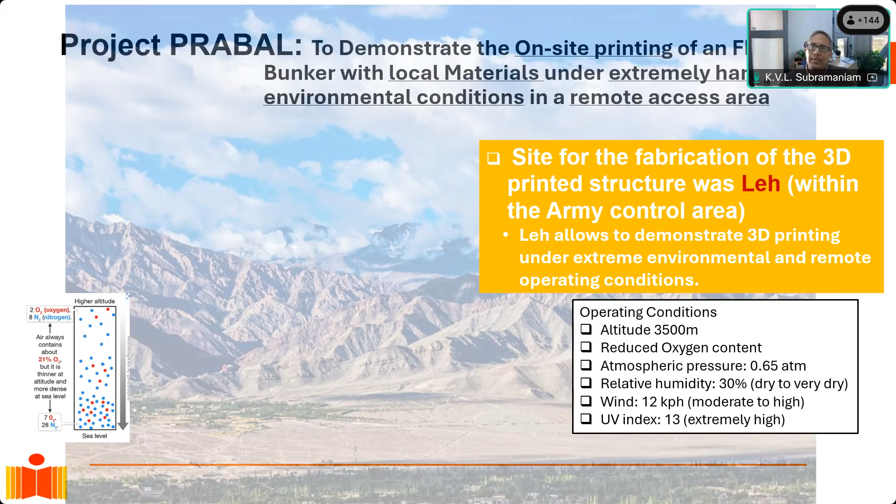I cannot reveal all the details out there, but more importantly, we actually designed it for a high level of thermal comfort. And we were able to demonstrate in situ printing. So in the previous example you saw that the bridge was off-site printed. That means it is printed off-site like a precast element and then assembled on-site. Here we actually did on-site printing of a bunker.

You see, this is the shape of the bunker that we were trying to achieve. And the dimples that you see on the surface are for 2 reasons. One is that it gives a very high level of blast and ballistic protection. And you see the multi-wall construction that we've done here. And if you see the pockets at the end here, these square pockets, these are where we were able to put in our regular reinforcement and fill it with concrete to give it the structural form.

The multi-wall system actually allows us to embed thermal control systems that give a very high level of thermal comfort. And even in a place like Leh, we are able to give a very high level of thermal comfort to our soldiers.

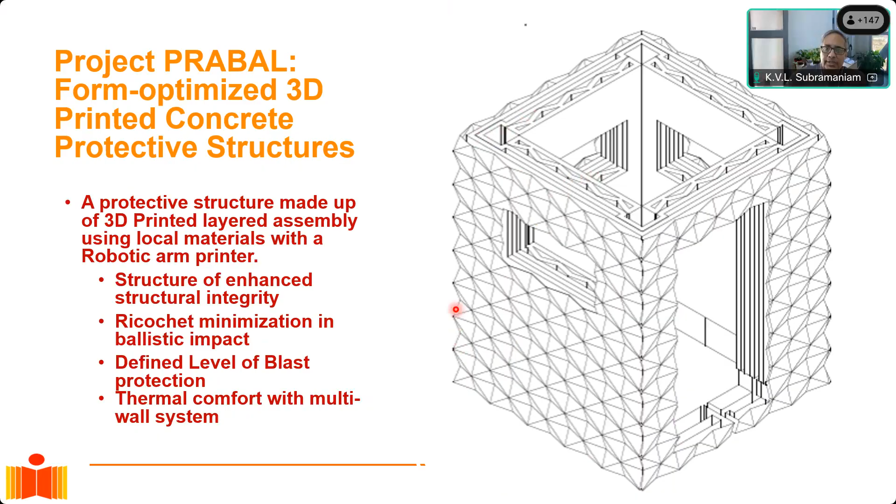So again, this is another form optimized structure which has been optimized with minimal use of material for very high level of protection. And I can say proudly that currently this is the world's highest in situ printed structure that was delivered with technology that was developed indigenously. The printing technology and the material was all developed indigenously, and it's available for use in our country.

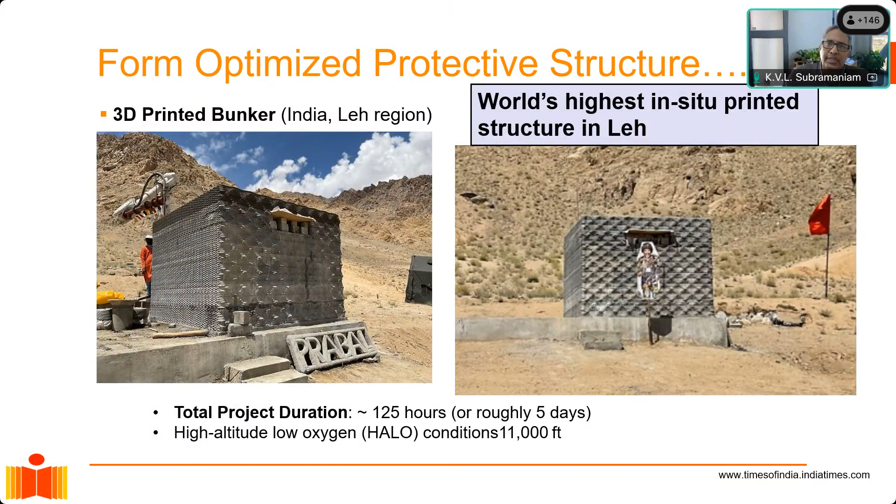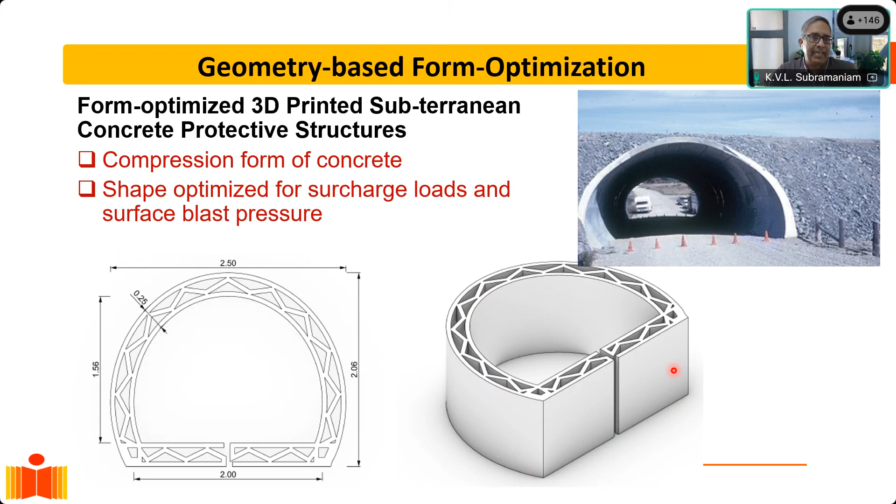Now, what is the current state of practice when it comes to using 3D printing? Typically, we do this multi-filament printing. So if you look at this wall here, it is not made up of a single filament. It's made up of multiple filaments, and you can leave pockets, these gaps, in between.

Because integrating reinforcement into printing is still not successfully done, a lot of times we leave these pockets like what I showed you here, and these pockets are meant for introducing reinforcement, and we use the 3D printed form as a stay-in-place formwork for casting cast in situ reinforced concrete elements which provide the structural system.

So that is currently what we are doing because of the limitation of not being able to co-print steel or other forms of reinforcement. But work is actively underway where people are looking at co-printing or co-fabricating steel along with concrete extrusion. We are looking at including internal reinforcement in the form of fibers in our structures so that we really don't need reinforcement bars. The material itself is ductile enough to be able to design with it.

But most importantly, in this kind of construction, because we have a multi-wall cavity system, I can use it for thermal control. And the diamond shaped facade that you see has been optimized for reducing heat gains. That is one of the objectives of providing this patterned surface: the heat gain that I get from the patterned surface is much lower than a flat surface that you typically see.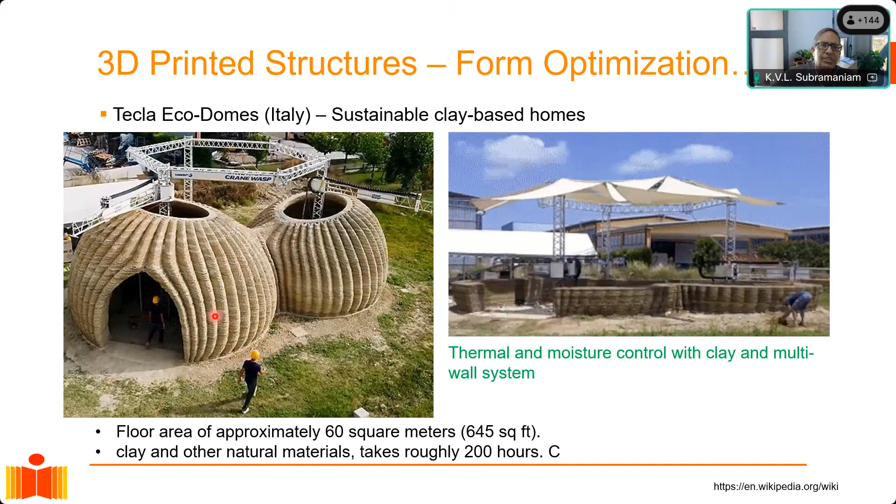Coming back to this 3D printed structure, now in Italy and in a lot of Europe, in Germany and even in Spain, they're looking very seriously at adobe construction. So printed adobe or printed earth clay, compacted clay, is being looked at very seriously because you can provide a very high level of thermal and moisture control inside an adobe 3D printed structure. And this is a demonstration structure that was done in Italy.

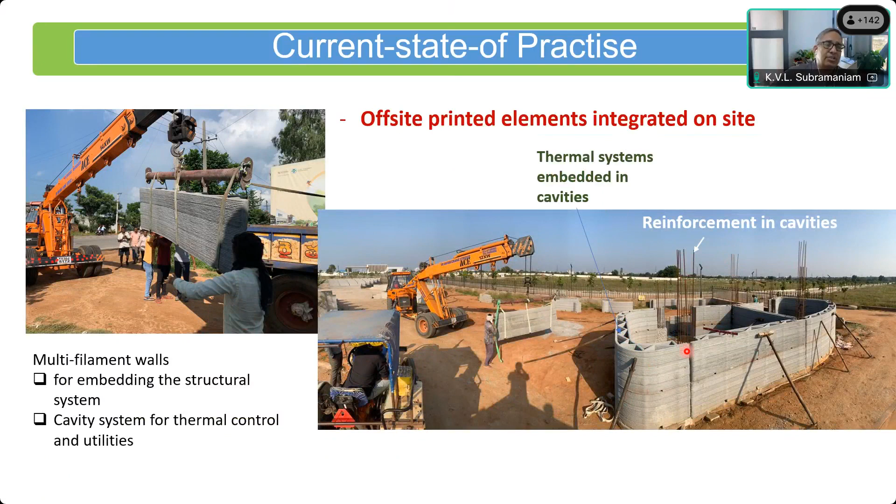So like I said, what we are currently working on is offsite printing. A lot of times we offsite print elements like walls and leave cavities in between. The cavities can be used for embedding thermal control systems or for embedding structural systems like putting reinforcement and creating a structural system internally. We're also doing on-site printing, or in situ printing as we call it, using gantry printers. I already showed you the printing we've done with the robotic arm printer.

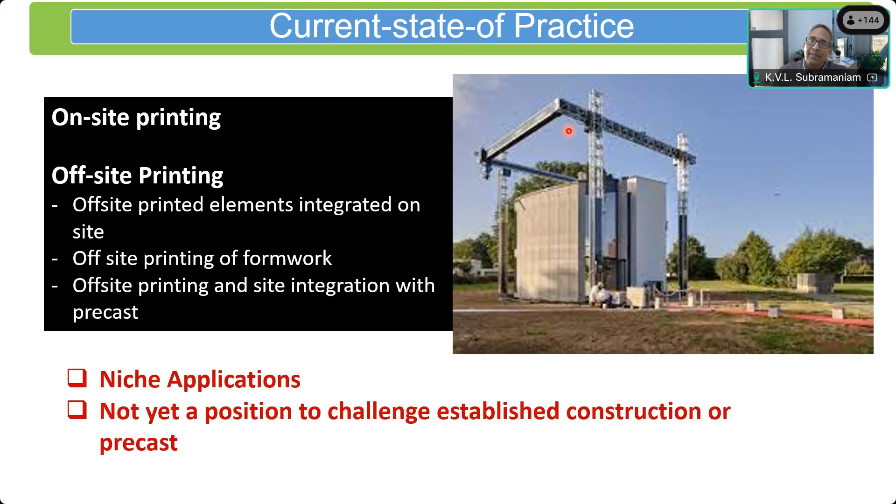All these elements were put together and post-tensioned for continuity. The advantage that I have in printing is every one of these elements can be different. I can print them very quickly, whereas in precast, changing the molds is not very easy. And precast works best when you have replicates.

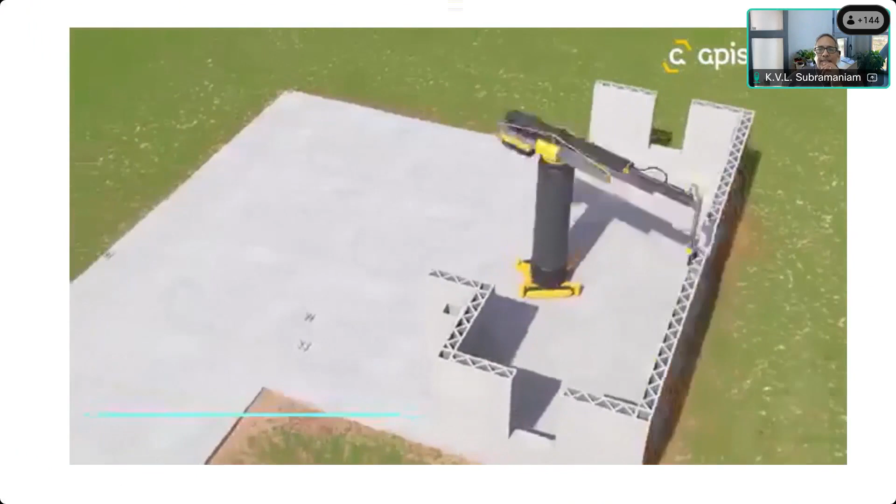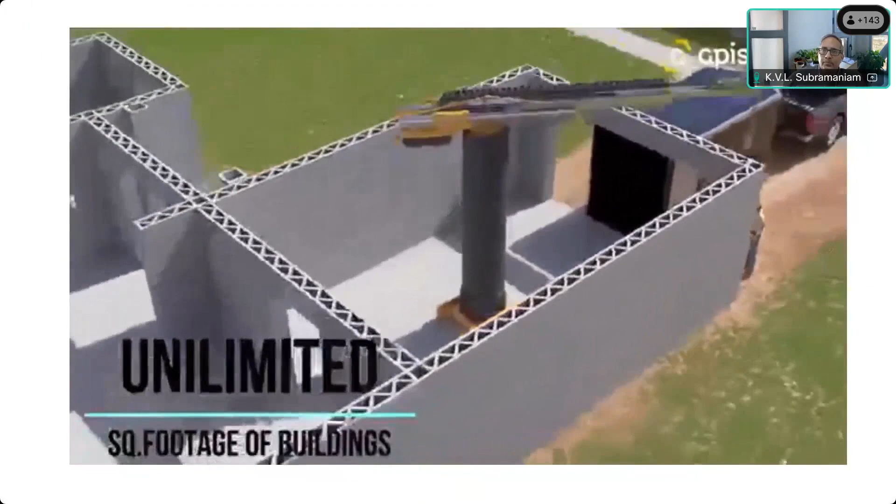Just a quick demonstration of what is in the works. Apis Cor, a company at the forefront of 3D printing, is now talking about this mobile 3D printer. The idea is that you take a mobile 3D printer, you should be able to print your way out, and you should be able to deliver a house or a simple structure using these 3D mobile printers. This is done very fast. Every individual unit can be customized, and you can have multiple of these robots. And what you see is a crane-shaped robot that I had presented to you before.

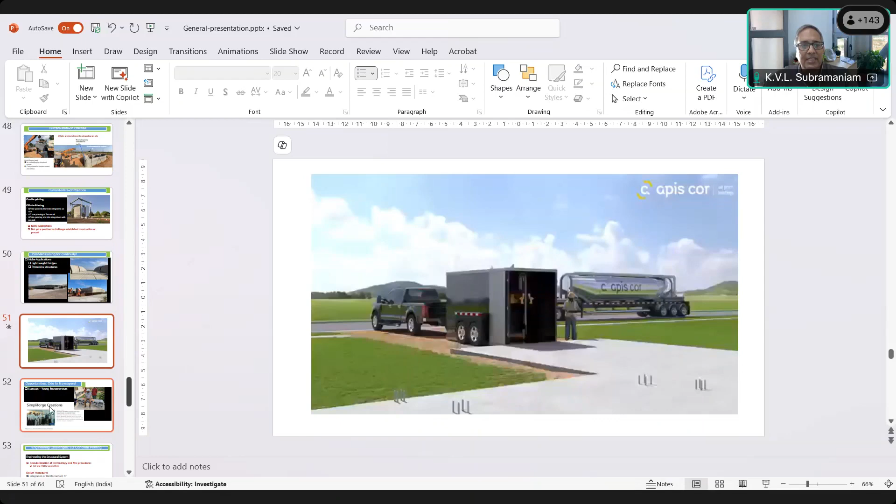One of the biggest challenges in all of this activity is the horizontal element. We still have not conquered gravity. So when it comes to elements like the slab elements, we are still stuck. And that's where we are trying to bring in some precast technology, integrating precast with this.

Now, the last thing I want to talk about here, and this is particularly to the younger audience, is this is a technology, it's deep tech. This is basically at the forefront of technology. You're harnessing digital fabrication, and it's on the cusp of digital, where digital meets physical reality. And most of the companies that are out there producing solutions are headed by young entrepreneurs. And my reach out to the young entrepreneurs, or particularly the young, and no offense to the older population or generation in the audience, this is ripe for starting something where a few of you can come together and start something like this startup that I'm working with.

Now they've come along and become serious technology providers, where indigenously we are now able to produce printers. We are able to produce the material. We are able to give printing solutions for different applications. And we are very proud of the work that we've done with the Army, particularly in developing these protective structures for the benefit of our soldiers.

So what are the challenges in 3D concrete printing? I've shown you the bright side of it, and mentioned some of the challenges, but the biggest challenge today is that there's no standardization. When we're talking about the design of any structure, we follow a code. Unfortunately, no such code exists for 3D concrete printing. Even the mix procedures are not standardized. Everybody develops their own set of mix procedures. They hold on to it very close to the chest. Nothing comes out of there.

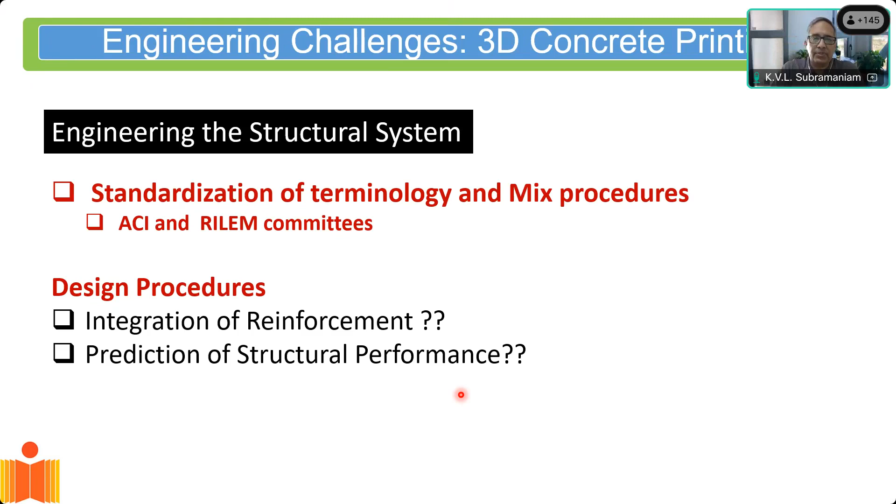American Concrete Institute and RILEM do have committees looking at developing standards for the use of this 3D concrete printing technology. Design procedures are still not existent, so one has to use one's imagination to come up with proper design structures if needed. Integration of reinforcement in real time is still not achieved, it's a work in progress. Prediction of structural performance - once I have printed it, what is my level of confidence that it will deliver the performance, the capacity that we need? There are very few full-scale tests that have been done. Most of us are relying on prototypes and testing prototypes, or relying on simulations to predict failure loads, capacities, or performance. I think as the field develops, we'll get a lot more data, we'll get confidence, and then we should be able to come up with standardized design procedures for the use of 3D concrete printing.

Now, the other challenge is the human factor. What I mean by that is, we're all used to thinking in a silo, we basically work in vertical silos. The only way this technology will become a game changer is if we work outside our silo. Robotic arms have been in existence for a few decades now. What we have done is simply take one of these robots out of the car manufacturing production line and use it for printing concrete. But that transformation has to take place, and that means we need the proper skill set, which has to come from outside the domain of civil engineering.

So we have to learn to work with other domains, which includes fields like manufacturing, additive manufacturing, material processing, and also architects. As civil engineers, I think we have to learn to work with architects and look into developing these architectural forms and other forms which are not necessarily rectilinear, and allow us to take advantage of this freedom that concrete 3D printing brings to deliver structures with a very high level of performance. We can target any performance variable you want: structural, thermal, acoustic. We can do all of this in our production technology.

Copyright and IP issues are becoming a major challenge. A lot of this technology is developed in the West, and those companies hold IPs on a lot of these things. So oftentimes we get stuck with that, and not having standard codes of practice is a big hurdle at this time, which is stopping us from going to the next step, which is mass production. So that being said, the last thing I'd like to say is that concrete 3D printing may be that Trojan horse that will force us into digitalization of construction.

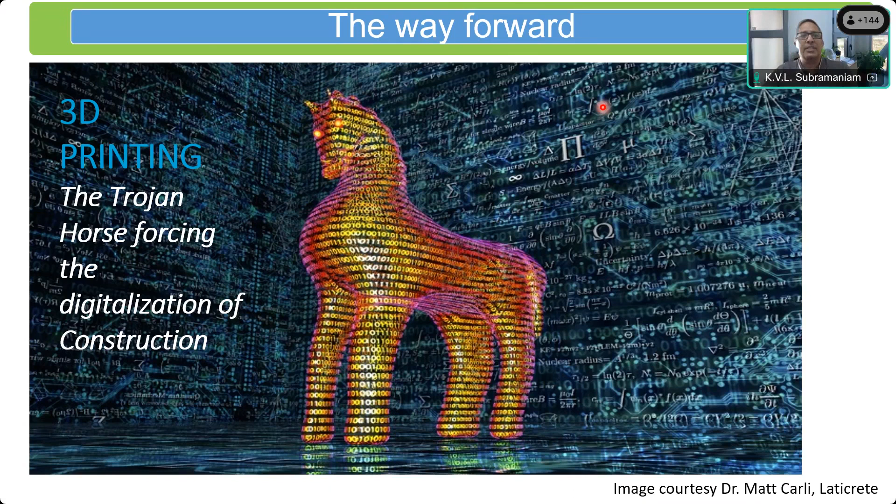What I'd like to say is that we often change in quantum leaps. If you look at the telecom industry, we went from having one telephone among 100 people back in the late 90s to having more than one cell phone for every individual in the country. That's a quantum jump. That happened because the digital revolution came early in the telecommunication domain. Maybe this is our Trojan horse. Maybe concrete 3D printing is that Trojan horse that will catapult us into the digital era without us realizing it.

With that, I'd like to thank you for your attention. I apologize for the very long talk, but I hope I've kept you entertained. Thank you, and maybe I can take some questions.

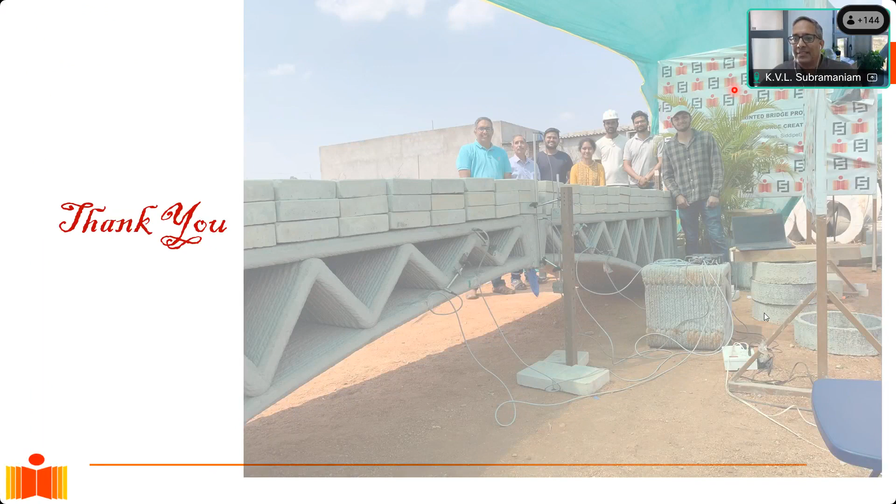If you have time? Yes, there were several questions coming my way in the chat box. I think there were several of them, and I was getting a little distracted with that. So shall I read them for you? Let me scroll up, there are a lot of questions. Let me see if I can find them. Otherwise, I can... Where are my questions? Anyway, I can read them for you.

Yeah, please, if you were able to locate them. I think working with additive manufacturing like 3D printing in Denmark, there are a whole lot of companies who are into 3D printing. Correct, and they are using concrete and waste material like plastic and wood also. Yes. So, a lot of this technology is coming from Europe and the US.

Like I mentioned, additive manufacturing is not new. This extrusion-based printing was done for plastics. Today you can actually buy a nice small tabletop plastic 3D printer for about 10,000-12,000 rupees, on Amazon. That's how much the technology has permeated. You can start printing small things using plastic filament, and it will print it for you. But the technology was being developed about 20 years back.